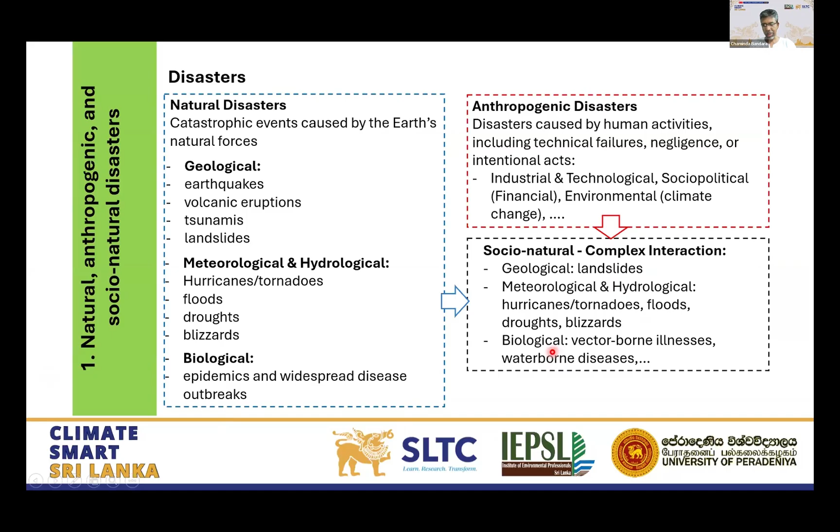Of course, one of the main issues in this socio-natural complex interaction is the climate change because of the global warming.

So if we look at some of these disaster records, what we see is an increasing trend of disasters, but fortunately, a reducing trend in the number of deaths. That is not because the disasters are less significant, but because the countries, the world, is developing. So we have a lot of technology to save people, to reduce deaths due to disasters. So therefore, even though there is an increasing trend of disasters, the number of deaths recorded is reducing. That is very fortunate, and also due to the development of technology.

And when looking at the significance, mainly the impact of the disasters, what we see is, when we categorize, for example, the droughts, the flood, the storm, extreme temperature, these are playing at a very high significance, including earthquakes. Of course, earthquakes are not mainly because of anthropogenic actions, but the others - droughts, floods, storms, extreme temperatures - are all related to climate change.

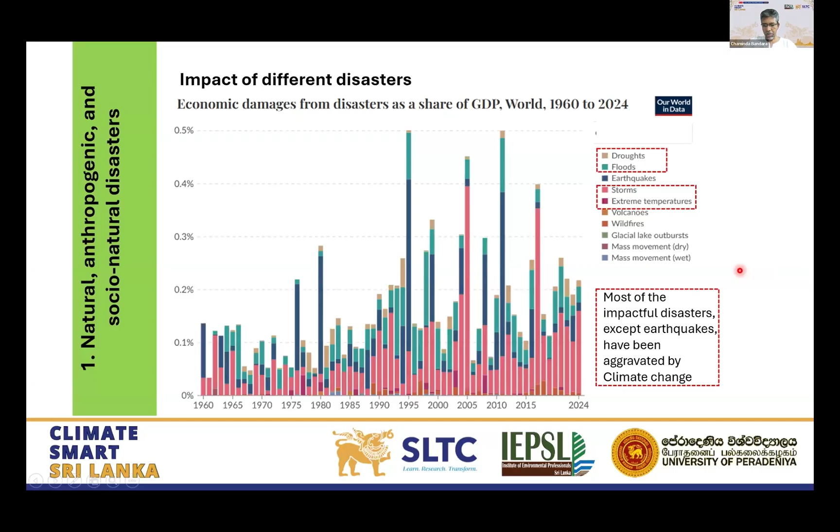A little bit about these anthropogenic actions related disasters.

I think we know the trend started from the Industrial Revolution, somewhere around 1800s, and then the consumption of materials, the consumption of energy, all those things increased rapidly, as we can see in most of this literature.

And at the same time, when you have high energy consumption, in return, we are emitting a lot of greenhouse gases. So again, as we see from 1800s, this increasing trend of emitting greenhouse gases.

And then we know that because of all these greenhouse gases that deposit at the upper layers of the atmosphere, that blocks the heat that penetrates into the earth, trapped within. So we talk about the global warming.

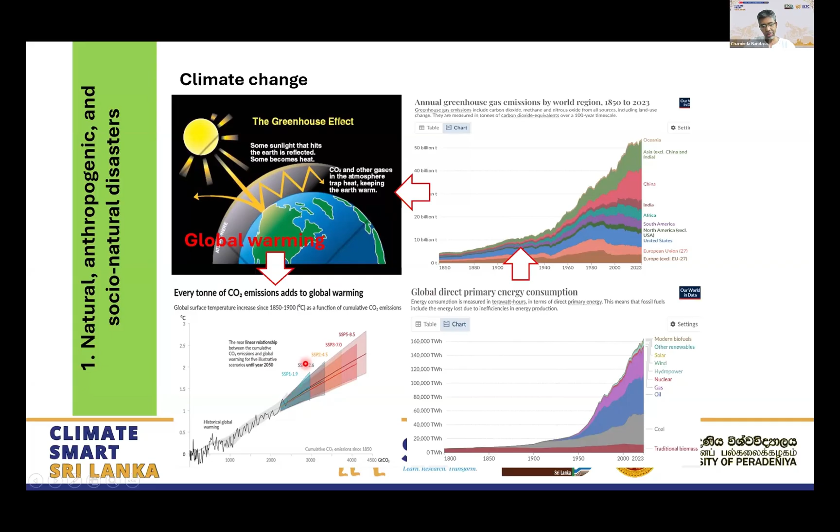And according to IPCC reports, we have almost exceeded the 1.5 degree temperature rise effect, which is kind of very significant and leads to a lot of problems in the world. So this is where we are at the moment.

And so with those, we are talking about these increased natural disasters. So as a result of the CO2 emissions, the climate change, and then increased natural disasters.

And so one of those is the disaster that we experienced in November. I think when we look at all around the country, this particular disaster's impact was for everyone, not for one region or one province.

And now where I am, in the central province, in and around Kandy, was one of the devastated regions. So I saw a lot of damages by myself because I am living here, and it was really impossible to think, just at that day and after 3 days until the things are cleaned out.

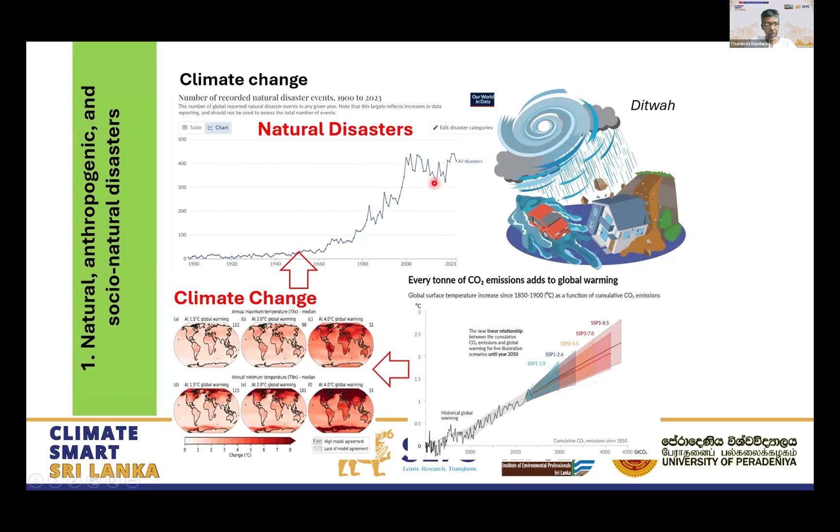And so now what is the relationship between this GHG emission and the construction and building sector? So that, because we are engineers, we are responsible for a large part of this matter.

Now, if you look at the records, again the literature, you see the electricity and heat, transport, manufacturing and construction, and then buildings. There are many items that are directly related to engineering that has a very high contribution to the greenhouse gas emissions, therefore to the global warming and the climate change.

So that is why I think as engineers, we should get together and discuss this. Of course, it requires all the other professionals, all the other disciplines to join hands to somehow minimize this problem.

The construction sector contribution is about 40%, from building operations about 28%, and then building materials and construction about 11%. Of course, this is a 2019 report, but it can't be a large difference even now.

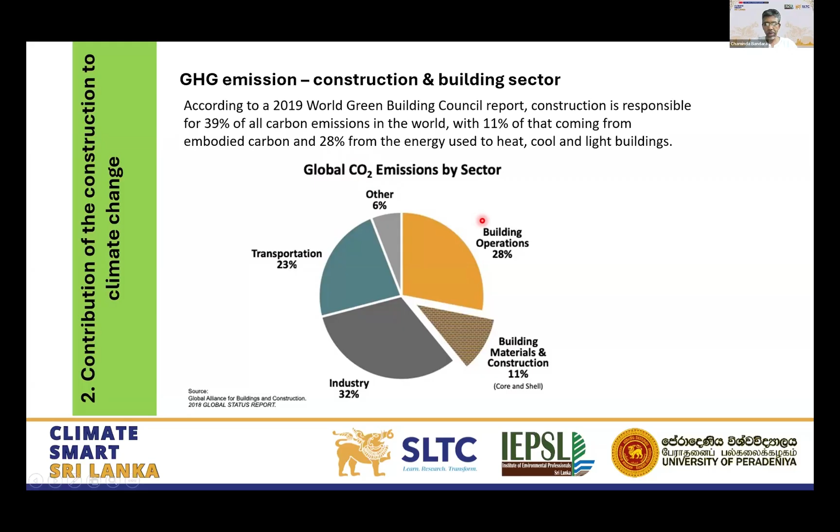So when we look at the population growth and also the building sector, the expected development in the future. By 2023, our population reached 8 billion, and by 2050, it is predicted it will be 9.7 billion. So that means within the coming 25 years, we are expecting another 1.7 billion people to come onto this Earth and be here.

So what does it mean? It means we have to expand the available or existing cities. We have to build further infrastructure, because this 1.7 billion within the coming 25 years will join us. So they need infrastructure as we need now.

So that means we are talking about further consumption of material, consumption, emission of carbon dioxide, if we don't take serious action.

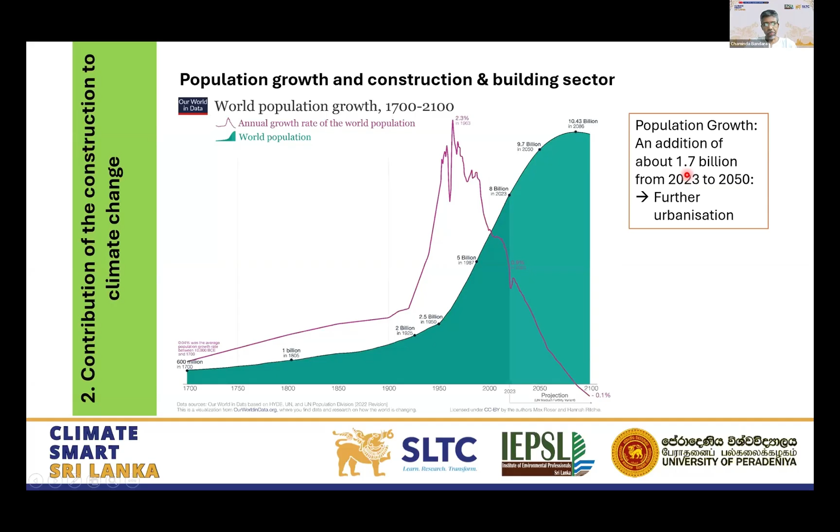That is how the urbanization is happening. The cities are expanding.

So the issue here, when we compare this city expansion with the greenhouse gas emission and also this climate change problem, is now to convert the carbon dioxide or the greenhouse gases back to the oxygen and the other non-greenhouse gases, the main thing that we need is the greeneries.

So what we do is, when we expand cities, the existing greeneries are reducing, isn't it? So then how can we convert this carbon dioxide back to oxygen if we expand our cities in this way?

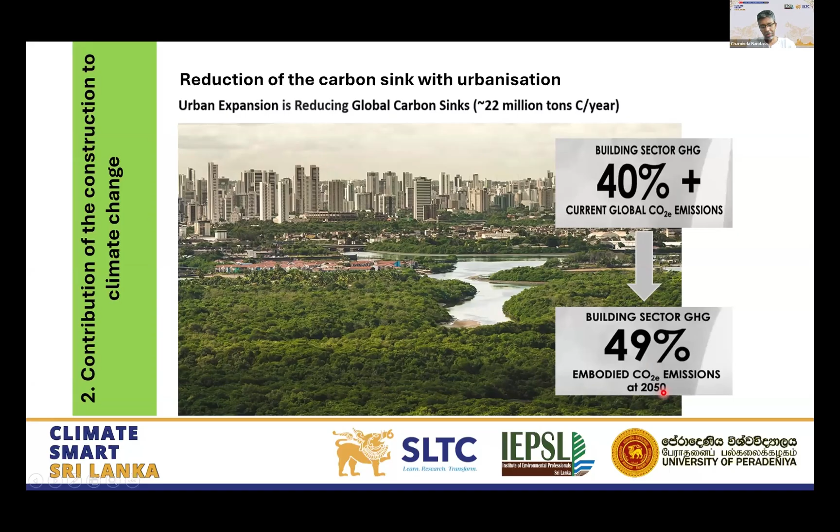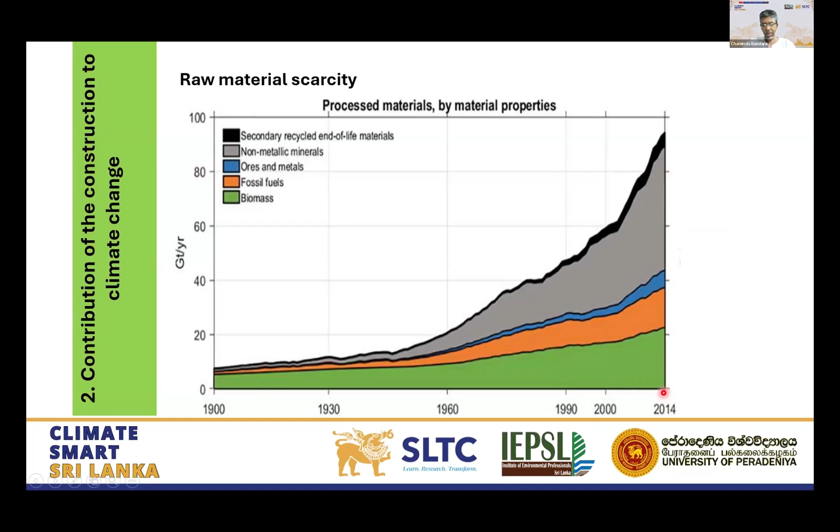So therefore, we are already in a material scarcity, that we know. The requirement we are expecting far exceeds what the planet can produce. That is the other issue we have to think about, because we have to expand cities. We need to provide infrastructure for the people, because everybody should have equal opportunities for living. But this is the problem that we have in the construction sector.

So here we talk about the future designs, the smart designs, the green buildings, the green cities, and all those. So climate resilient infrastructure is coming here. That means we have to look at the disaster side, because climate change is already happening, so disasters are aggravating. So when we, as engineers, design and construct infrastructure, one of the main things to look at is the disaster management aspects.

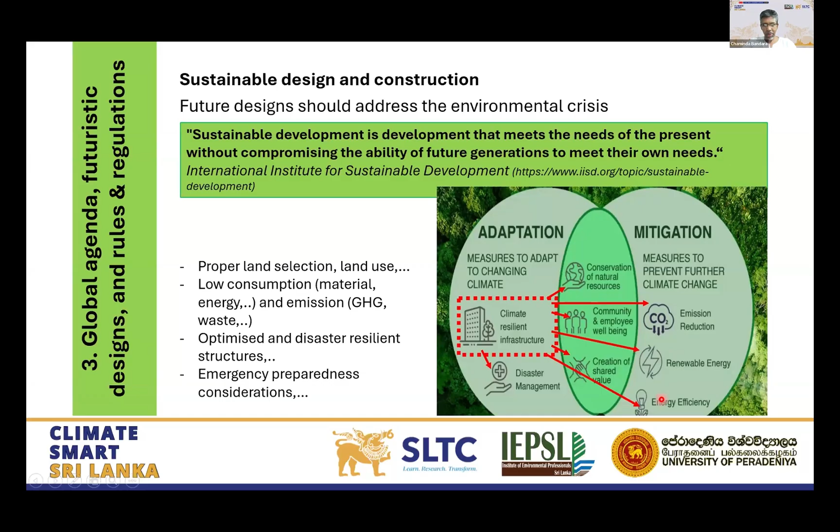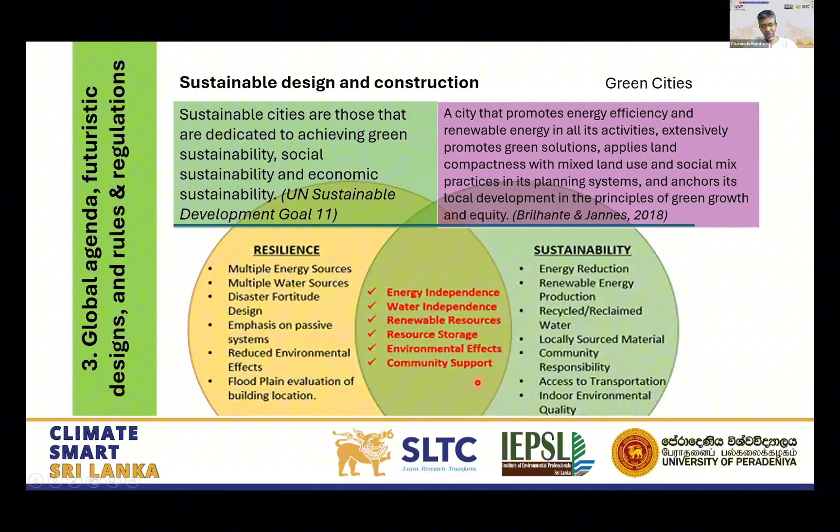So we have the global agenda, the Sustainable Development Goals. As we know, two goals - goal 9, which focuses on resilient infrastructure, and goal 11, once again focusing on the same side. There are already defined targets that even as a country we have agreed to follow, to achieve these targets, so that we have to remember. And also the Sendai framework, where we talk about minimizing disasters and the disaster effect on communities.

So then about the futuristic designs. One important thing is, now it's not always that we try to develop all the places on the earth or on this planet. We have to identify where to develop and what cost we will have in those developments, because then it's an optimization problem.

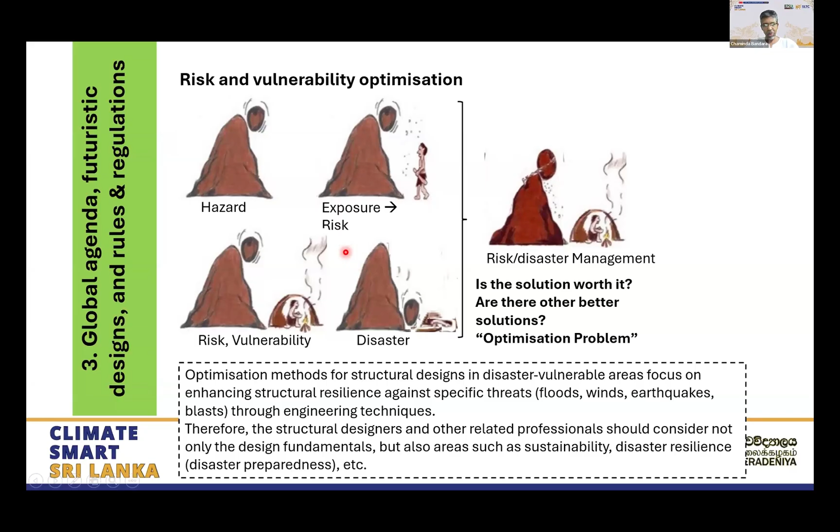Now, when we look at this optimization problem in detail, what I'm trying to explain is: we have a population to serve, and there are natural disasters. Not everybody is exposed to these disasters. Those who are exposed are only part of the population. When the population is growing, the exposure, or the number of people exposed to disasters, is also increasing, because people will go and build their infrastructure wherever possible, because they need those.

So with increasing population, the exposure of people to disasters will expand or increase. And the other thing is, if natural disasters are increasing, then also the population will start being affected. Like when there is a lot of rainfall in the upcountry, we see the damage happen in the cities, even up to Colombo, with a lot of flooding. So because when you have aggravated disasters, the population who were not even in disaster-prone zones can be affected.

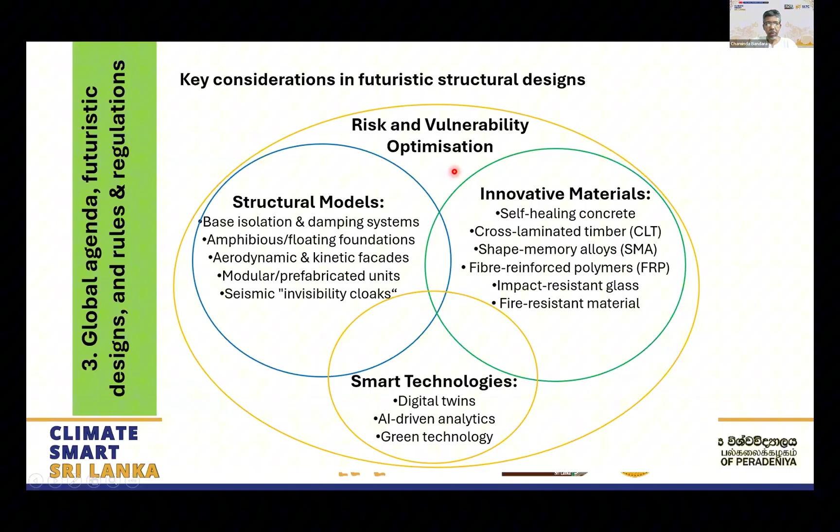Now, the key considerations in this case are here. Now, the structural design codes. As we know, we use design codes for our designs. So are these codes evolved enough for such smart designs? I am sure the codes are evolving, but still there is a lot to do. Of course, those are the engineers who should do these things.

These fixed rules in design codes should be flexible, and the design should be mostly performance based and not rules but frameworks. And we need to get the AI assistance in our designs, the smart materials, flexible structural forms, so they can adapt to various situations and all that.

So that is one side. On the other side, the rules and regulations, the building approval, the regulations. So are we still can go with these strict rules and regulations? Even rules are there, sometimes we are not following it. That's a separate story. But to go to this, there is a lot that we have to do.

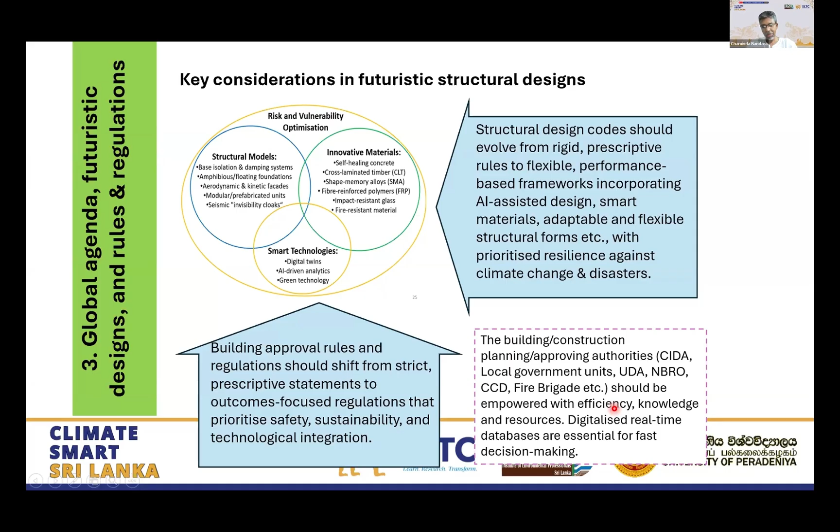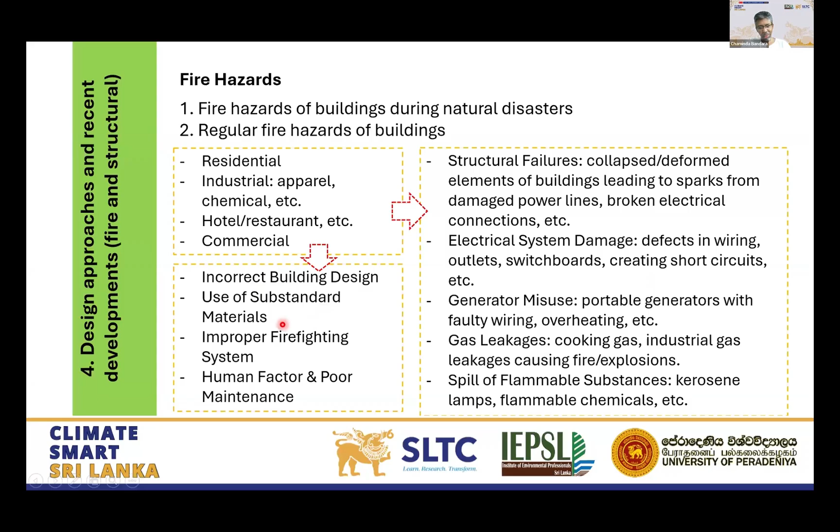And also incorrect building designs, use of substandard materials, improper firefighting systems, and human factors. All these are reasons. And if we look at records of fire hazards, we can see that building fires are one of the largest.

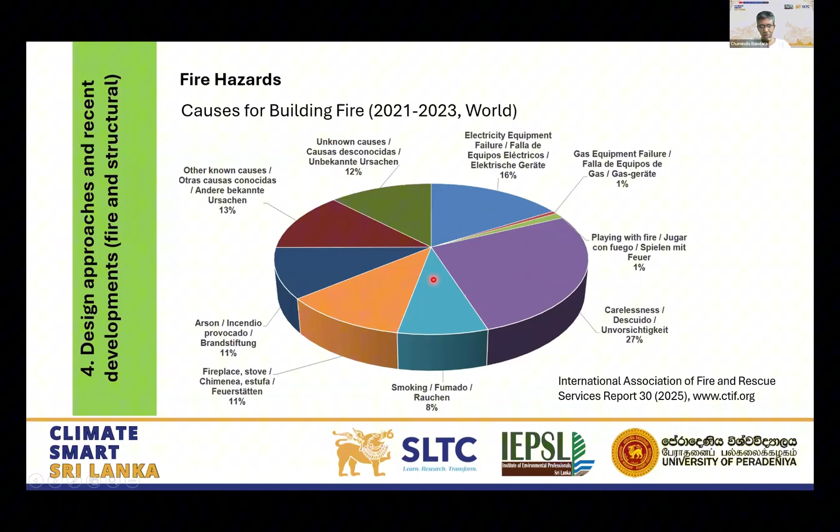If you see now, this is world fire statistics - electrical equipment, gas and related fires, and also smoking-related fires, carelessness. So there are many factors that cause fires in buildings. And if you see the deaths, most are due to residential building fires.

So in structural fire designs, of course, in Sri Lanka we have almost adopted using Eurocodes. Especially for the design of concrete structures and composite structures, there are several common areas, whereas for steel structures and aluminum structures there are slightly different areas to look at. And timber structures are kind of different a lot from the other codes, and also masonry structures.

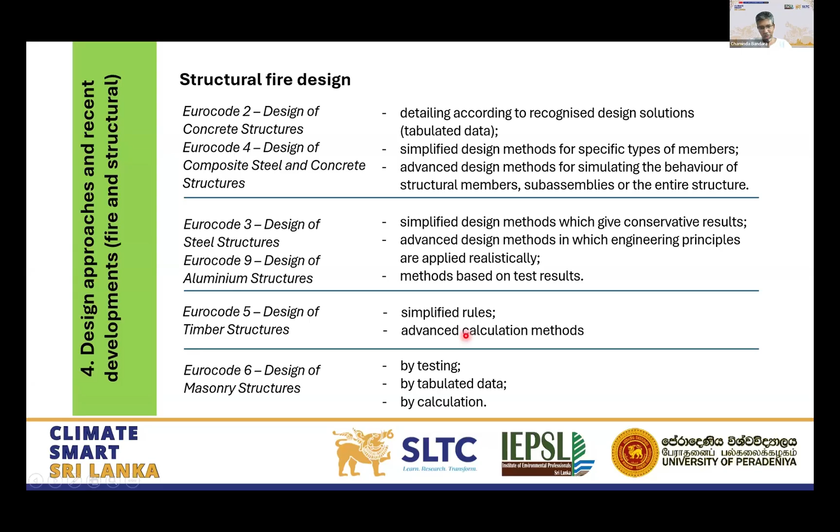So that is the available design tools that we usually use. And also, for the Eurocodes, we have the national annexes, and fortunately we have the fire design national annex also by the SLSI.

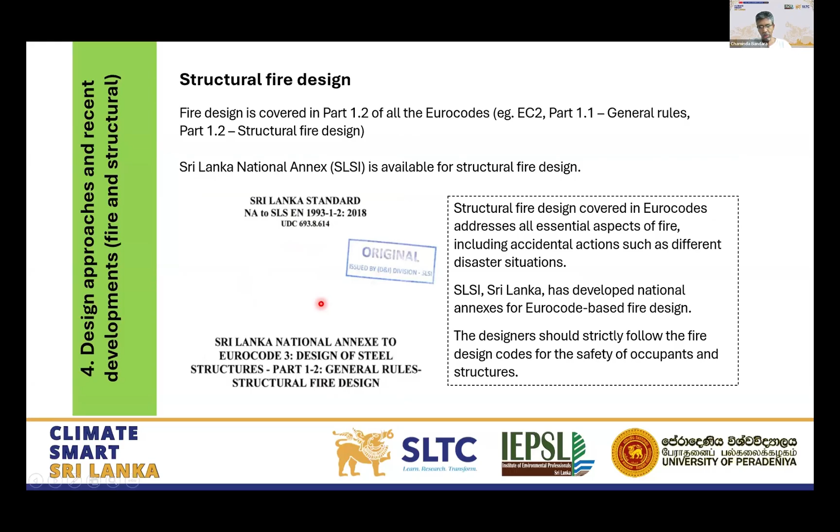So I think this is something noticeable, because we are also updating the design codes with local input.

And design fire scenarios, when we look at, we have three situations - the accidental design situations especially are applicable. Accidental design can be this disaster, for example. Then the structures where a particular risk of fire arises as a consequence of other accidental actions, relevant to disasters, for example. So we have to consider those scenarios.

And then in the normal designs, we have the global analysis, the analysis of parts of structures, and the member analysis. In the global analysis we look at the overall performance of our structures, how the compartments behave, and how the members behave in structural fire.

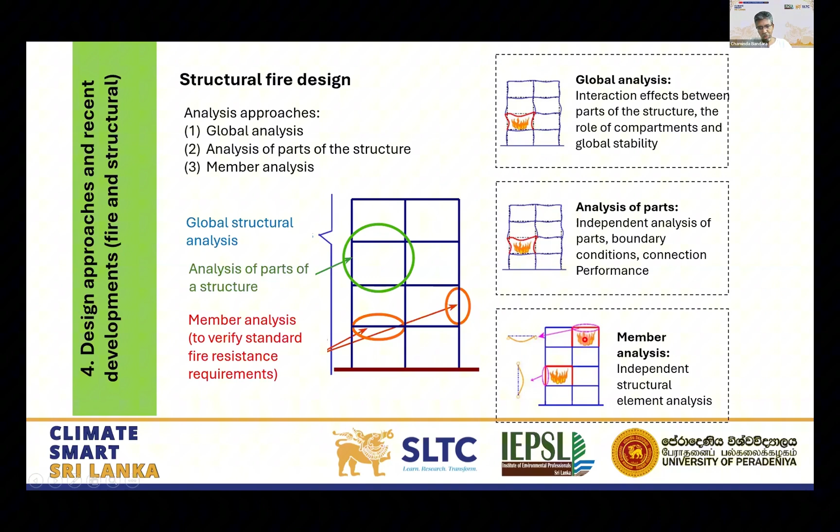And then in compartmental designs, in Sri Lanka there are specified areas or volumes for these compartments depending on the type of building, and also the effect of openings to be considered, and also the height of smoke, because smoke is one of the causes of most deaths due to fire. So this smoke height maintenance is very important.

And also when we go to the local member related areas, we have to verify the material strengths, the strength of members, and also the protection of those members in our analysis, and also the numerical simulation.

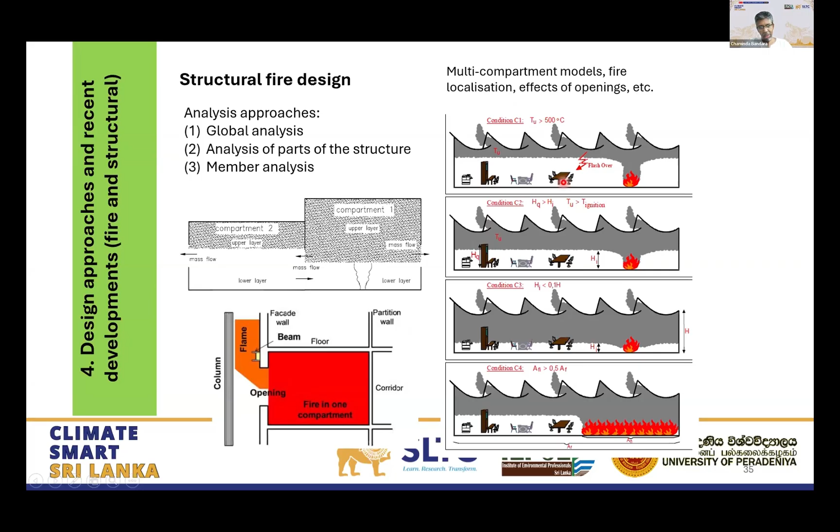So what I am showing you is some of the work we have done by our team related to cladding studies, like glass facade fire, and various other sustainable materials. So we have done some work, and also because the simulations are possible now.

So I think that's where we want to direct our nation, because we are talking about smart development. Rather than wasting a lot of time on real testing, if you have validated numerical models, those are very easy and convenient tools for the predictions for the designs.

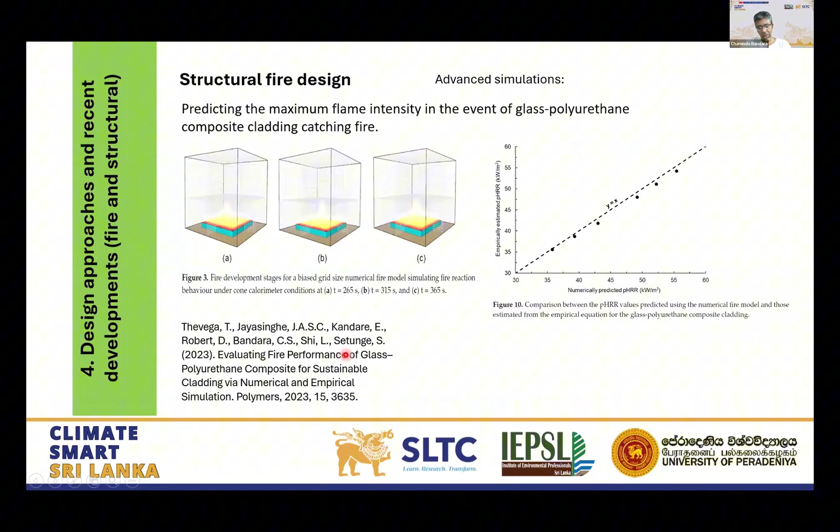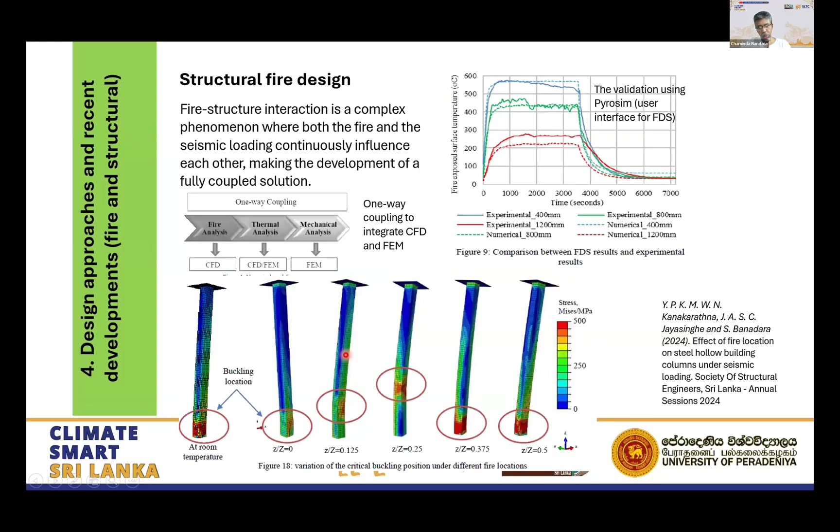So hoping to have questions and answers, and back to the moderator, Dr. Herath.

Right. Thank you, Professor Bandara. I think that was a very insightful discussion, and I think you looked at mainly four different aspects on the natural disasters and how the construction and building sector contributes from various angles to this climate change, and also how the global stage, or how the other developed nations and also the developing countries look at this - the policy level decisions on rules and regulations. And lastly, you touched upon the design approaches, including all these Euro codes and the national annexes, and gave some idea on where we are as of the global trends.

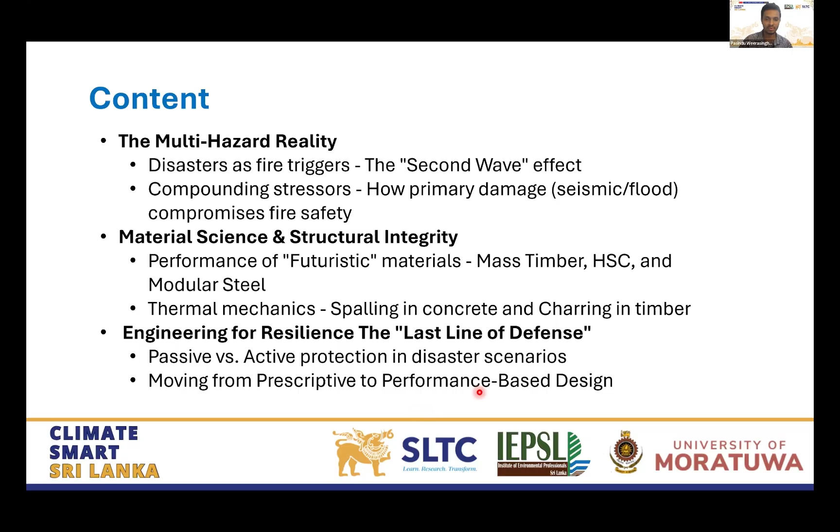So before I go into the details, I hope you, maybe if you were born in that time, you may remember this disaster, the 2001 World Trade Center collapse.

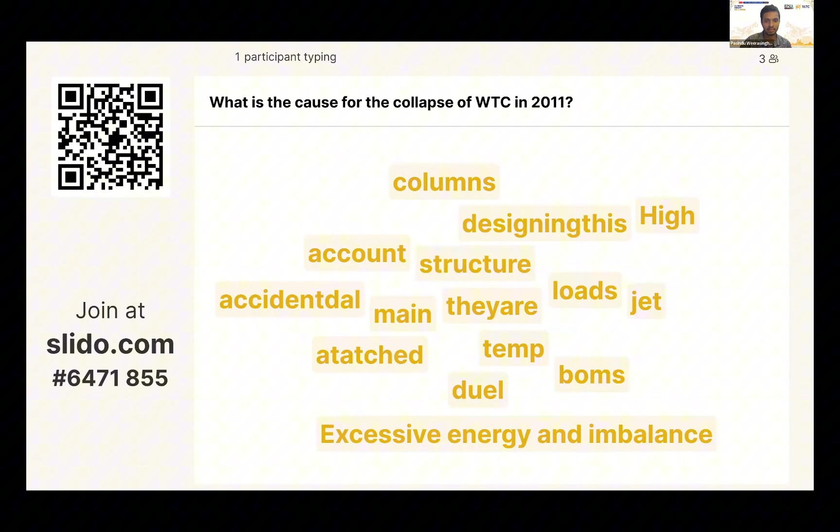Right, so we have a couple of answers ranging from columns, structure, jet loads, bombs, fuel, temperature, and excessive energy and imbalance. The word that I was looking for is still not there.

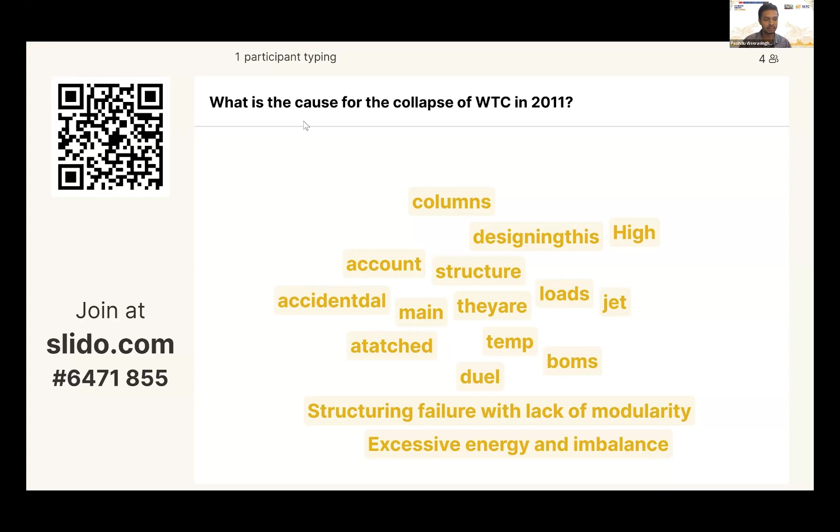Maybe we'll move on to the next slide. Thank you for your enthusiasm. Yes, I can see one other participant is typing. We'll give one minute if anybody else is willing to join.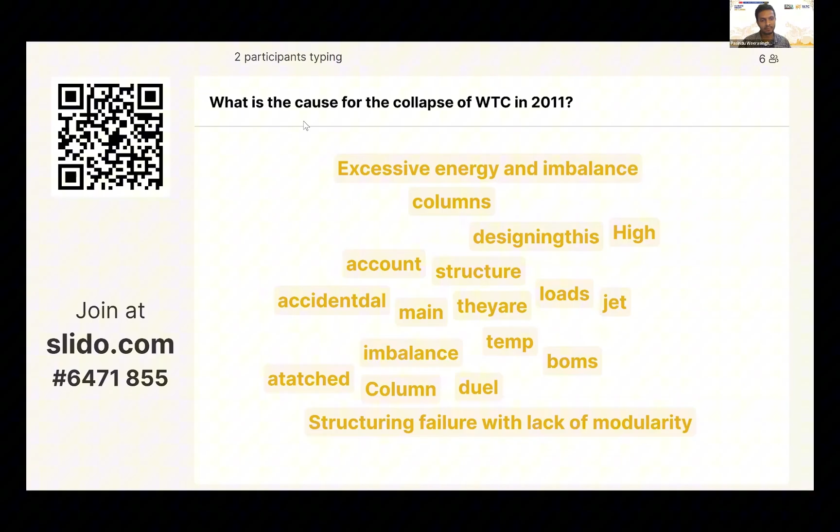Hitting the center of gravity, geopolitics - yes, in a way it is true. I mean, it was a terrorist attack after all.

Steel columns are not fire protected enough - yeah, we are getting there, I think. Actually, the columns were fire protected, but we'll discuss the real reasons now.

Now, this was a tube in tube structure. We have an inner tube and outer tube, which are closely spaced columns acting as an outer tube and an inner tube. So the rigidity of the structure was given by these two tubes, and they were connected using lightweight floor trusses. Now when the plane impacted on the tower, there was damage to this outer perimeter. So the outer tube was damaged.

But actually this was designed for such an impact load. In the design, it was considered that if accidental damage happened to the outer tube, whether the inner tube would resist the lateral loads and hold the structure without any catastrophic failure.

But the next thing that happened triggered the progressive collapse. There was a lot of fuel in this aircraft, and due to the blast impact, this fuel got ignited, and then there was fire. And due to the impact of the blast, the protective layer that was protecting the steel members from fire got damaged, and now the steel is directly exposed to these fires, estimated at about 1500 Fahrenheit.

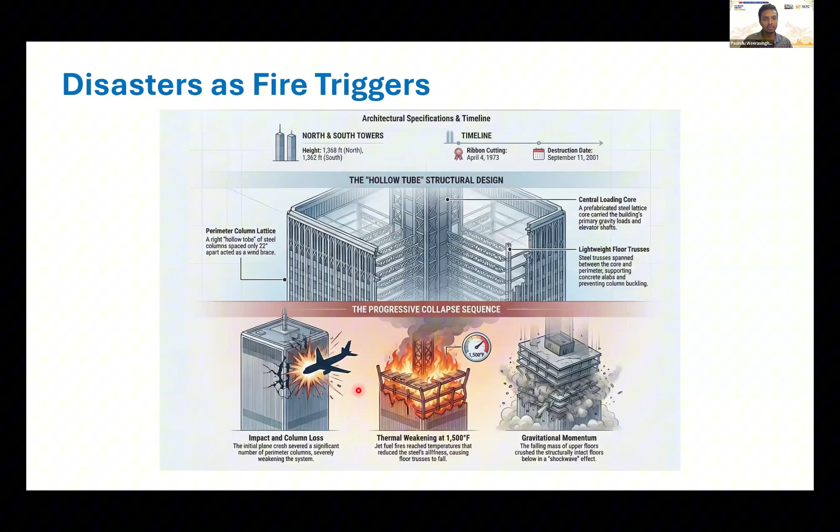And if you think about the earthquake situation where the ground shakes, it could result in failures in gas pipelines or power failures or failures in power lines, and these would cause a secondary fire, gas fire, or electrical fire. Due to the disaster situation, it is difficult to control - firefighters will have difficulty accessing, and the scale of the disaster is significant in an earthquake event. So it is another case where a disaster will trigger a fire event.

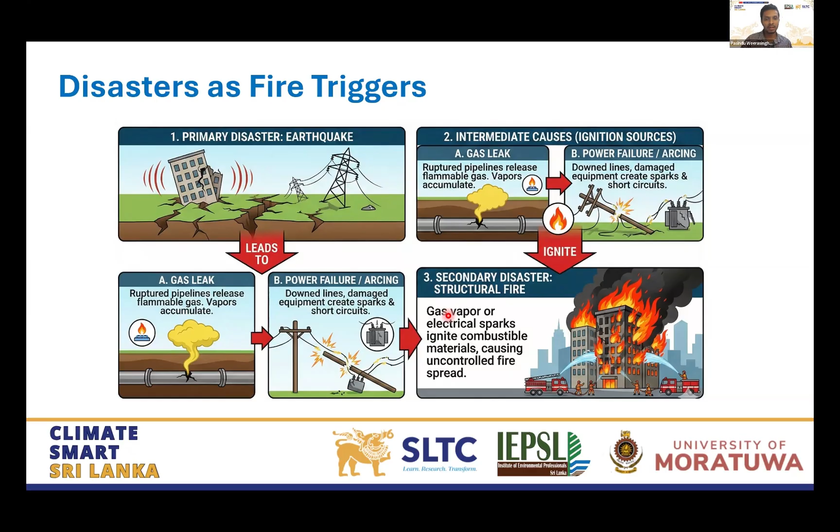And if I take another example, wildfires. Wildfires, if not controlled, can reach the urban environment. In wildfires, certain things are generated called embers - flying heated particles. Due to the wind, they get carried away, and when these flying embers hit or touch a combustible surface, it will ignite that surface as well, causing a fire a certain distance away from the wildfire.

So this is called the wildfire interaction with urban interfaces. Again, the disaster was a natural disaster, wildfire, but it is turning into a catastrophic fire event, a secondary disaster that could affect our own livelihoods.

So this is a very good example of such an event, the Kobe earthquake that happened in 1995. After the earthquake, it was reported that approximately 300 fires occurred. You can see from this image the scale of the devastation that happened there.

The probability of why it happens is like this: it could ignite due to toppled furniture, movement of hot equipment, or electrical short circuits. If it causes ignition, then it can spread. So in disasters, fire is often the second wave that causes significant structural damage.

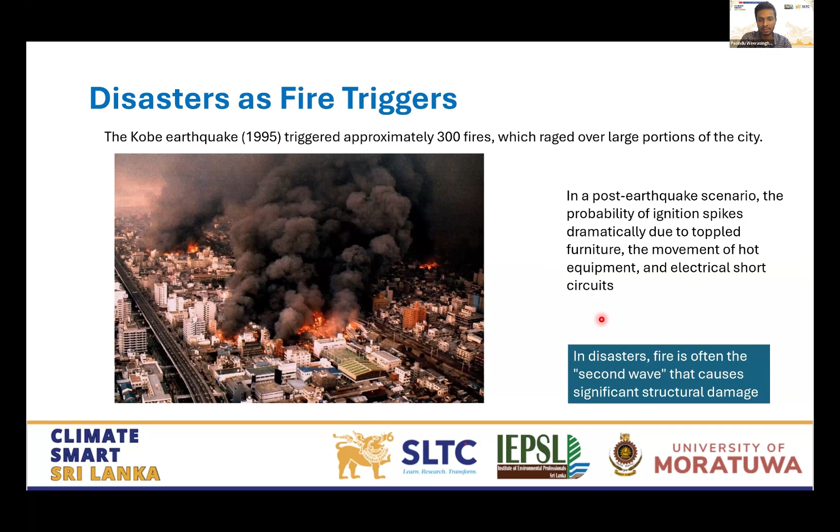In case of an event like Ditwah, what could happen in the Sri Lankan context? If a structure is subjected to flood or wind damage, the structural integrity is compromised. It will have openings and cracks, and no longer can fire be contained in a certain place. We call this in fire engineering terms the compartmentation of fire, containing the fire within an enclosed environment. That is not possible if damage like this has happened.

So then as a secondary event, if a fire occurs or ignites, that would be uncontrollable. It will quickly reach the flashover stage, and also it is difficult for firefighters to access such scenarios.

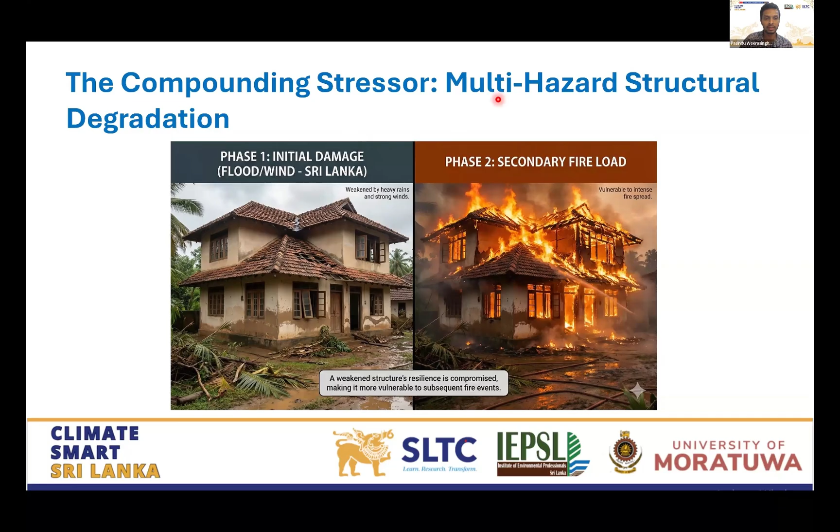So it's a multi-hazard degradation. We call it compounding stressor. The stress that occurred due to the disaster is elevated due to the secondary effect of fire.

Due to the primary disaster, it could be a blast, impact, seismic event, or a flood event. The structure faces severe secondary thermal loads due to a secondary event, and that initial disaster often cracks the fire-resisting compartment walls or strips away any sprayed fireproofing if it is a steel structure. Then the secondary fire will induce extreme thermal expansion or catenary forces on the already damaged structural frame. Finally, this combination of mechanical damage and material degradation dramatically increases the risk of progressive collapse of the structure. So this is the background to my presentation.

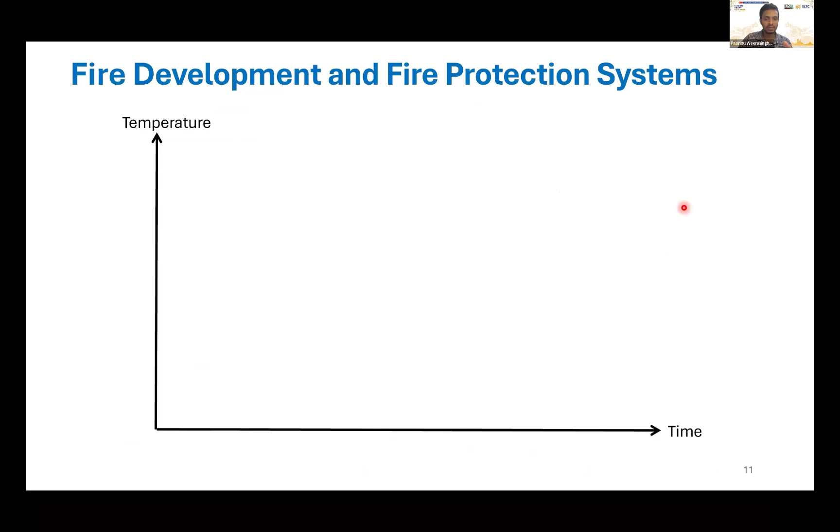Before we move ahead with the other slides, I would like to give you a brief overview of some technical terms that we use in fire engineering. To categorize a fire, we use a time-temperature history, and this is the behavior of a natural fire curve. It will have an ignition phase, a flashover stage, the ultimate stage, and finally the cooling stage.

The ignition phase can take about... these are rough figures. During the ignition stage, the temperature will increase slowly, and then this scenario called flashover will happen. Flashover means suddenly all the combustible material in the vicinity of that particular compartment will catch fire. We call it flashover.

So after the flashover, you can see that it grows rapidly. Before the flashover, we call it the pre-flashover stage, and these temperatures are just estimated values. After the flashover, the fire will grow rapidly and reach the fully developed stage. Then after the fully developed stage, maybe the fuel will run out or the ventilation will cease. Probably the most common thing is the fuel running out, and then it will no longer burn, so the fire will decay gradually. That is called the decaying phase or cooling phase.

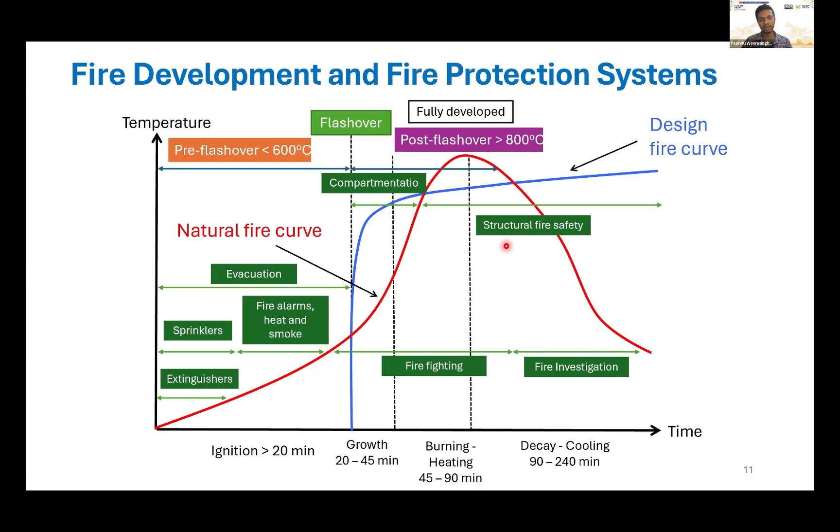So the passive fire protection that I'm going to discuss next is based on this post-flashover behavior, and the fire investigation can happen after it has decayed or cooled down.

We have several standard time-temperature curves which represent the behavior of a fire. Typically we use the ISO standard fire curve, which looks like this. In certain cases the fire will be more severe, such as in car parks or where you have more fuel load. In such cases we use a fire curve called the hydrocarbon curve or other fire curves which have a much more severe, rapid increase in temperature at the early stage.

The severity of a fire is identified not by the maximum temperature it reaches, but by the area under the fire time-temperature history. That means even if a fire has a higher temperature but cools down quickly, its severity is less compared to a fire which lasts for a long period, even though the temperatures are lower.

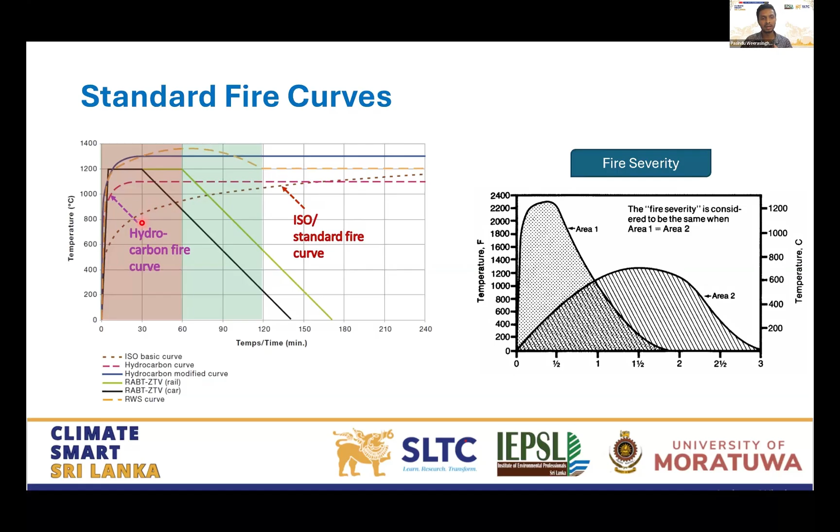Then we have something called parametric fire curves. All these fire curves I have shown are design fire curves. You can see certain cases have a cooling phase, but these do not depend on certain characteristics. Simply, it's a standard prescribed time-temperature history, irrespective of the characteristics of your structure.

But in certain cases we may have to look into the structure as well, depending on how much openings you have, what is the ventilation condition, what is the geometry of the space you are having the fire in, how much fuel load is there, and what material is burning.

So if you take all that into account, we can generate something called a parametric fire curve. It has an increasing regime, flashover stage, post-flashover, and then the decaying phase as well. The higher temperature and the duration of the decaying phase will all depend on the factors I mentioned. I will later explain what is meant by performance-based design.

If you're actually going for a performance-based design approach, these parametric fire curves are the ones to use. And as I mentioned before, the severity of the fire is described by the area under the time-temperature history.

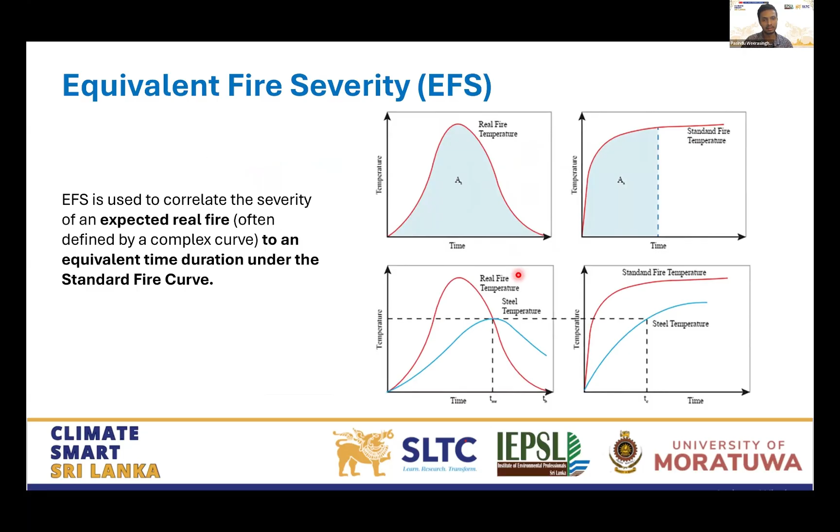And then finally, what we need is a certain fire resistance from our structural members. The fire resistance level can be categorized and measured by three criteria. The first is structural adequacy, the ability to maintain the load-bearing capacity for a duration of time when exposed to fire. That is called the structural adequacy criteria.

Then the integrity, the ability to act as a barrier that resists the passage of flames and hot gases. So if the fire is burning here, this should act as a barrier for a certain time period where smoke and flames will not penetrate to the other side.

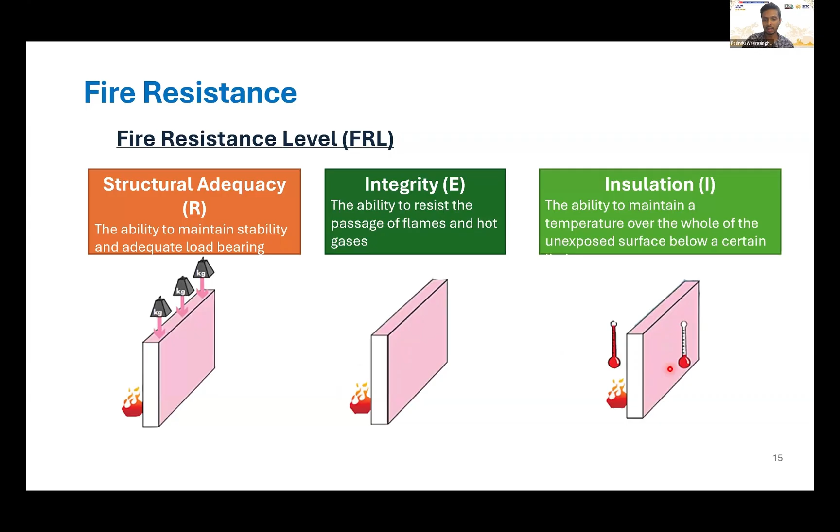And finally, the insulation, the ability to maintain the temperature of the unexposed surface for a certain period of time when the fire is happening on the other side of the element.

Usually these fire resistance levels are given as a time period. If you say 60, 60, 60, that means when exposed to, let's say, a standard fire, until 60 minutes it will maintain its structural adequacy, until 60 minutes it can maintain the integrity criteria, and until 60 minutes it will maintain the insulation criteria. So it is a 1-hour fire rated element.

It can be a fire-rated wall or a fire-rated door, or it can be a fire-rated structural element or non-structural component.

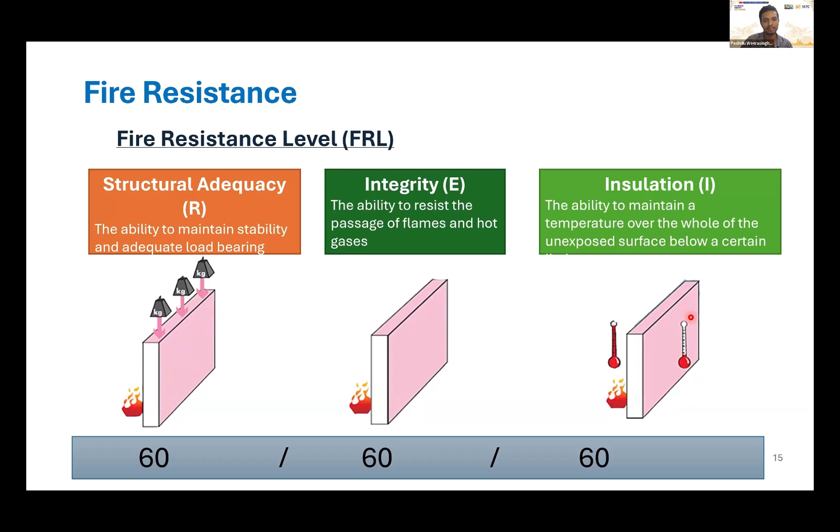Then, as fire safety engineers, our aim is to mitigate the impacts from the fire hazard. So the first line of defense is these fire safety provisions and fire codes, as Professor Bandar mentioned. Our one is ICTAD fire regulations, and they are developed to incorporate appropriate measures to mitigate the destructive impact of fire in our structures.

The mitigative measures can be in the form of preventing ignition in the first place, and if ignition happens, minimizing the fire spread after that. That could be one approach. The other approach is, if ignition happens, we have to facilitate the safe evacuation of occupants before the structure fails. And thirdly, until the fire is controlled or contained, we have to make sure the structural integrity is maintained, so the structure will not fail until the fire is controlled.

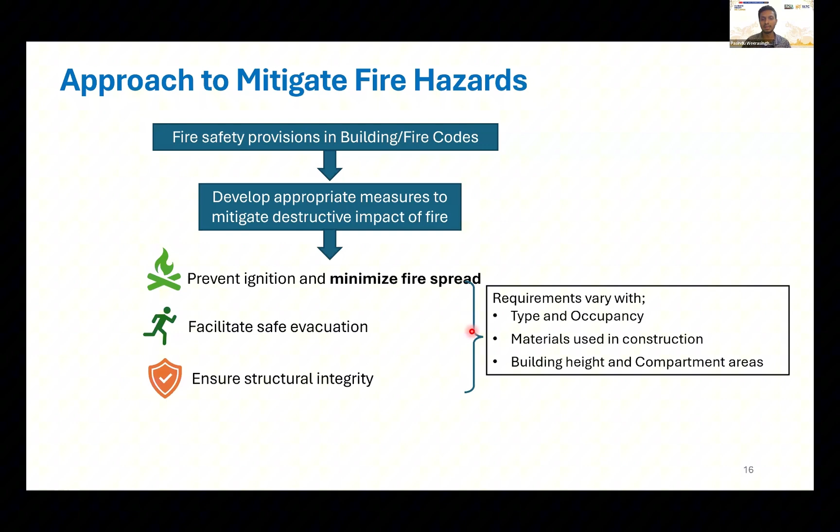These requirements will vary by type of building, occupancy level, the materials being used, and also the building height and compartment area. So we can't have one solution for all structures. It will be a building-specific or structure-specific solution that we have to incorporate.

As for regulation, CIDA regulations are there, and if you look at the global arena, the International Building Code, the National Construction Code, or NFPA guidelines, these are some of the prominent fire codes that we are using. And minimizing fire spread, we call that compartmentation.

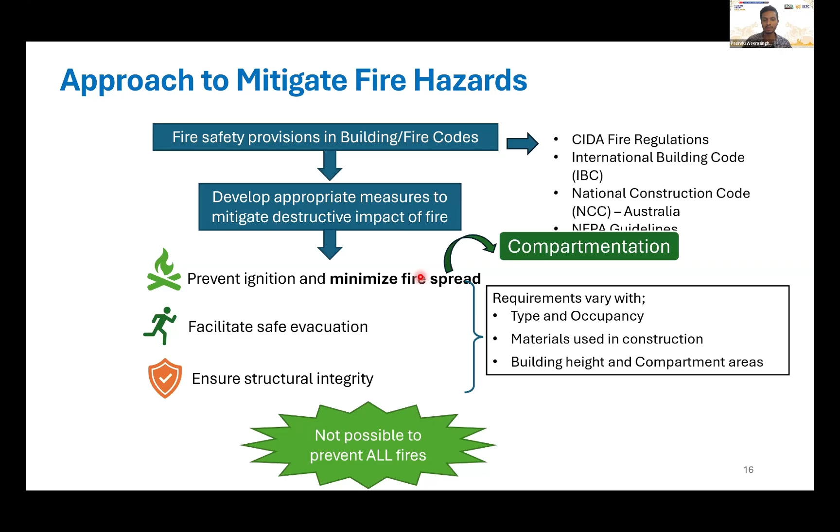That is the basic concept in passive fire protection. But however much we try to minimize this harmful effect, it is not possible to prevent an event of fire, because it's an accidental event, right?

So as designers, what we do is place certain strategies to minimize the occurrence of this. And if a fire occurs, we try to minimize the consequence impact on our lives, property, and the environment. That can be achieved by two means.

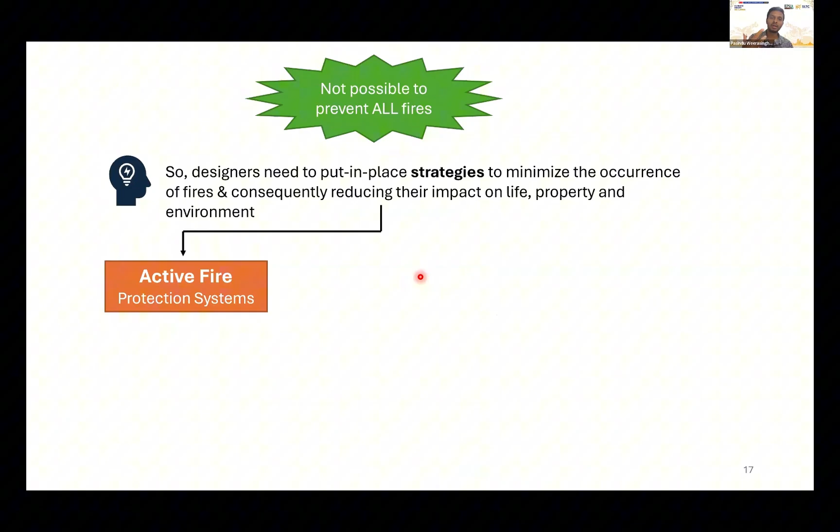One is through active fire protection systems, which are activated when a fire occurs. Examples are fire sprinklers, fire detection systems, and fire alarms, things like that. Basically, they react to fire. That is why they are called active fire protection systems.

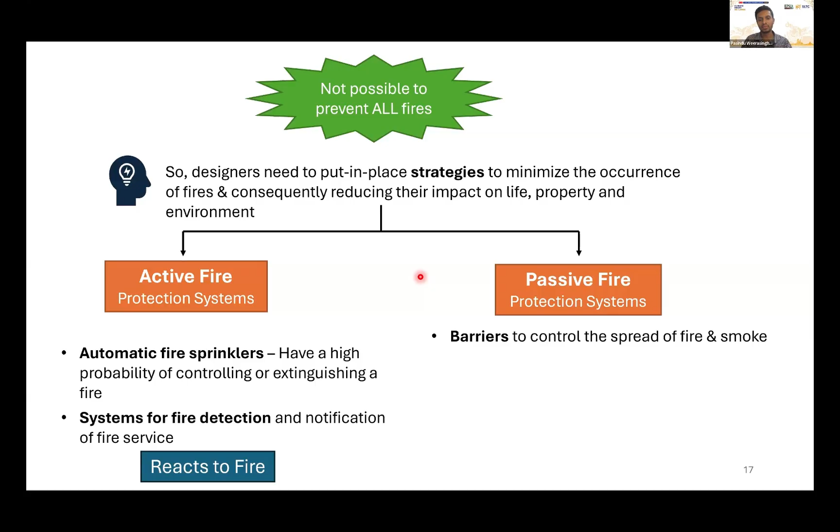Then the other side is the passive fire protection system. These are not activated, they are just inbuilt in the structure. One passive fire protection measure is barrier walls or fire doors to control the spread of fire, basically to maintain the compartmentation.

In case of evacuation, the building or structure should have safe travel paths for the movement of occupants as well as firefighters to come into the building and fight the fire. And finally, until we do all those things, the structure should not collapse, so we need a fire resistant structure.

So these measures are designed to contain the fire if it occurs. In case of a disaster, I will talk about it later as well, this active fire system has a chance of malfunctioning due to various reasons. So in that case, our last line of defense is these passive fire protection systems.

In terms of differentiability, in terms of mechanism, active fire systems require some kind of triggering, but passive fire protection relies on built-in properties, so inherently they are there. In terms of effectiveness, active fire protection systems are effective mainly in the early stage of fire, before flashover as I showed you before.

But passive fire protection is effective even in the fully developed stage. The objective of active fire protection is to extinguish and facilitate early evacuation, whereas for passive fire protection, the purpose is to contain and ensure structural integrity or stability during a fire.

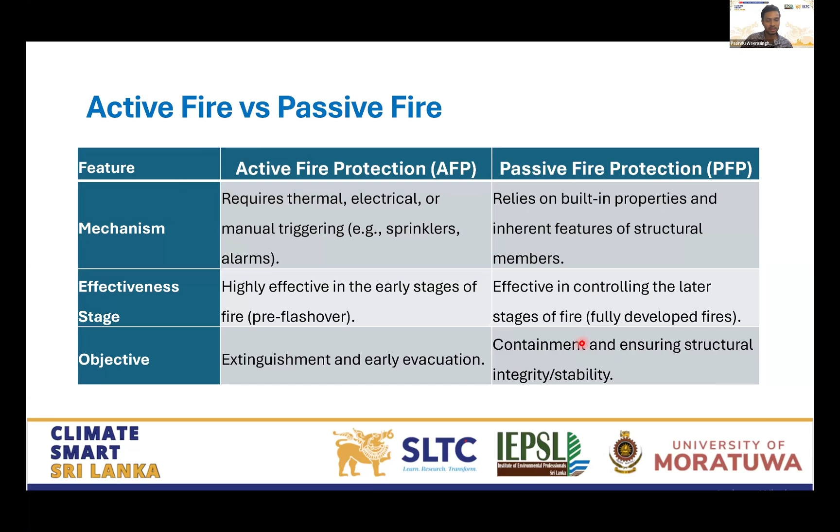So for the next five minutes, I will briefly talk about different material behaviors under fire, mainly timber, high strength concrete, and modular steel frames, because now we are moving into this era of sustainable construction, and we have to look into these futuristic materials and how they behave in fire.

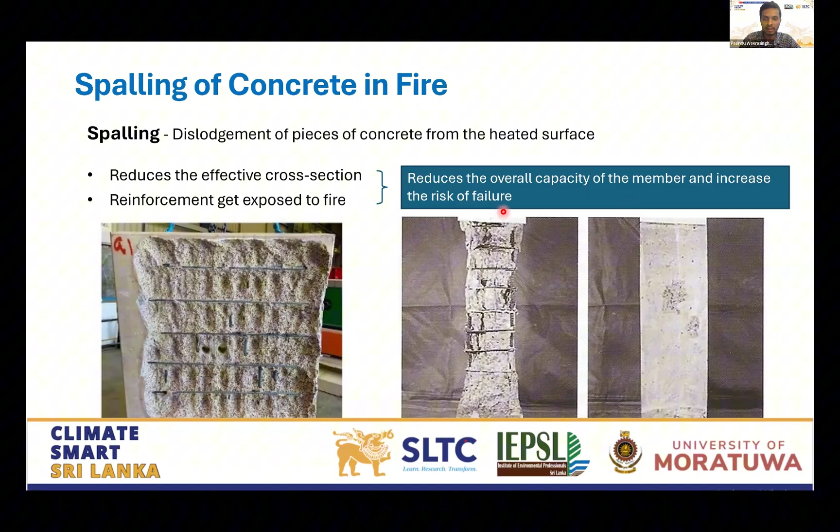In terms of concrete, especially high strength concrete, spalling is one of the critical issues. That means when it is subjected to fire, the exposed surface of concrete will dislodge, reducing the effective cross section of the concrete member, and the reinforcement becomes exposed to fire. Overall, that reduces the capacity of the member and increases the risk of failure.

So why does concrete spall? Mainly because of pore pressure development during fire. In case of a fire, the moisture trapped inside the concrete tries to move away from the heat, or tries to penetrate inside, but there are no free paths as such. It has to move through the pore structure of concrete, and somewhere it gets stagnated and pressure develops.

Once this pressure develops, it causes an expansion, trying to expand from the inside, causing tensile stresses. Once that exceeds the tensile capacity of the concrete, this part will dislodge or detach from the original structure.

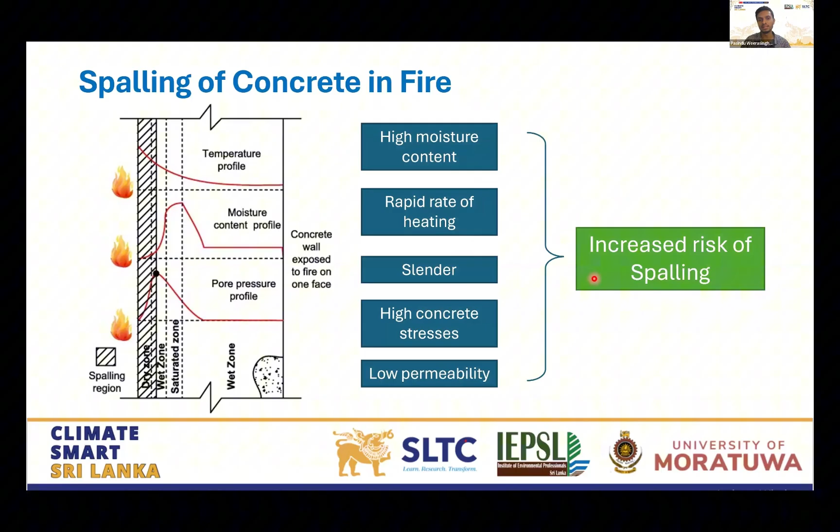So if you have high moisture, rapid heating rate, slender members, high concrete stresses, or low permeability, especially in high strength concrete which is low permeable, all of these increase the risk of spalling in high strength concrete. So then what is the solution?

One solution is adding small polypropylene fibers to the concrete. At around 200 to 300 Celsius, these fibers melt and create a path for the pore pressure to release. If this pore pressure is released, that will not generate high tensile stresses.

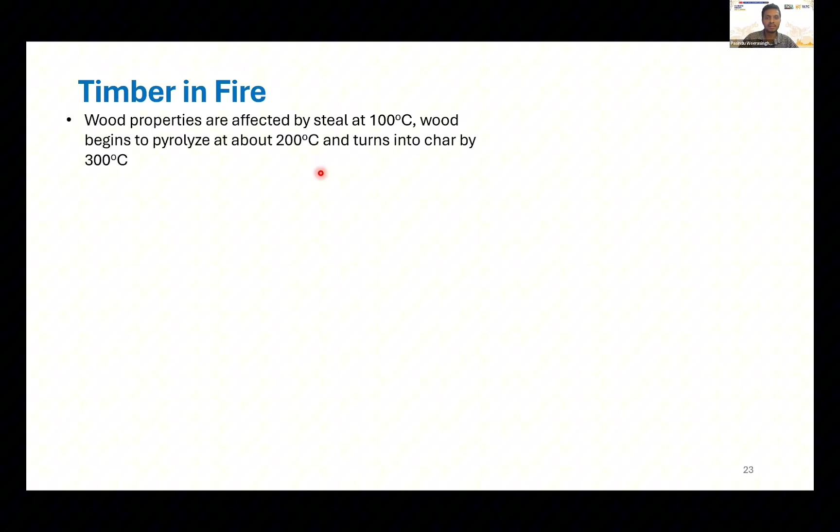Another material becoming more popular is timber. Although we think of it as a combustible material, certain characteristics of timber are actually beneficial in fire. Timber begins to pyrolyze at about 200 Celsius, and turns into char at 300 Celsius. This charred timber is this black colored part.

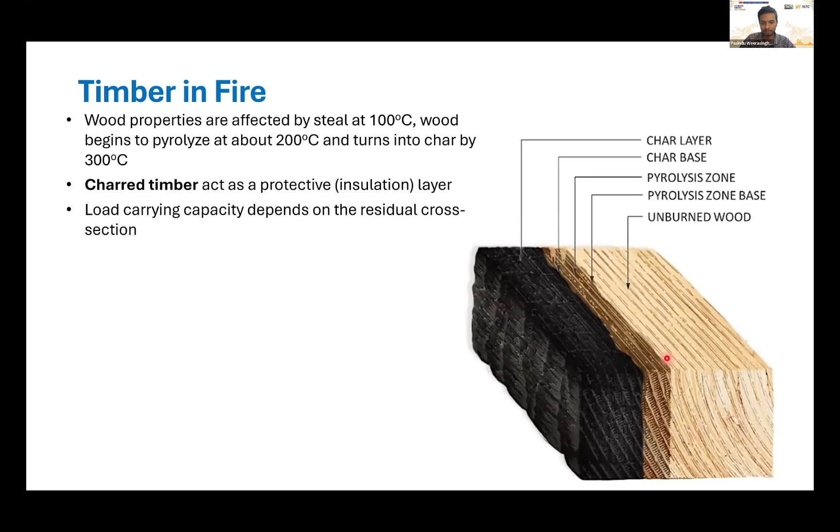That is beneficial because it acts as an insulation layer, protecting the inner timber from further charring. So the load carrying capacity of a timber member subjected to fire will depend on this protected layer, which we call the residual cross section.

The charred timber can't be used to carry any loads. So the fire resistance of timber members will mainly depend on the rate of charring - how fast it chars when subjected to fire, and how fast it reduces the usable residual cross section. If it's charring too much or too fast, that is not preferred. If it's charring slowly, that type of timber can withstand fire for a longer duration.

Cross-laminated timber is becoming popular - we now have some multi-story buildings from CLT, not in Sri Lanka but in other parts of the world like Europe and Nordic countries. CLT buildings have superior structural performance and can even be used as columns in tall buildings.

But the fire characteristics need to be questioned, because unlike normal timber, once CLT chars, since it's constructed using several layers, that charred layer will fall off. Once it falls off, new timber is exposed and subjected to fire. So the charring rate will increase overall in cross-laminated timber. Risk of delamination and exposing new layers to fire are some issues that need to be addressed in CLT members.

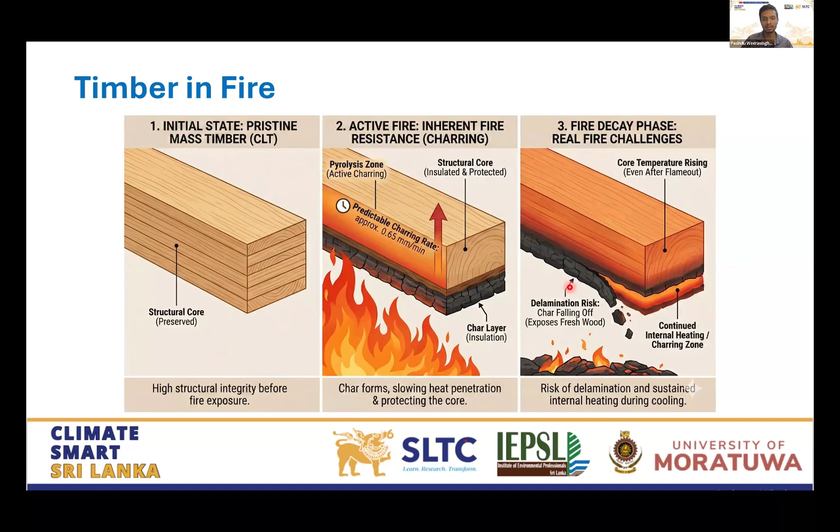Finally, I will touch on modular construction. Modular construction is off-site fabrication of buildings - it's like building blocks put together to make a final structure. This was a new topic for Sri Lanka for many years, but now contractors are using this modular technique even for tall buildings, which is a good thing.

Especially in disaster situations, modular construction can be the game changer because you don't have enough time to construct in-situ buildings on site. In that case, modular construction can become handy.

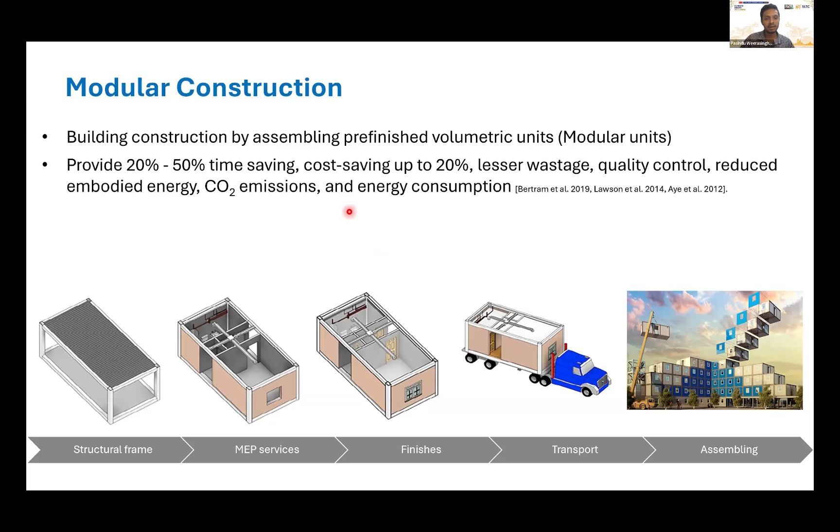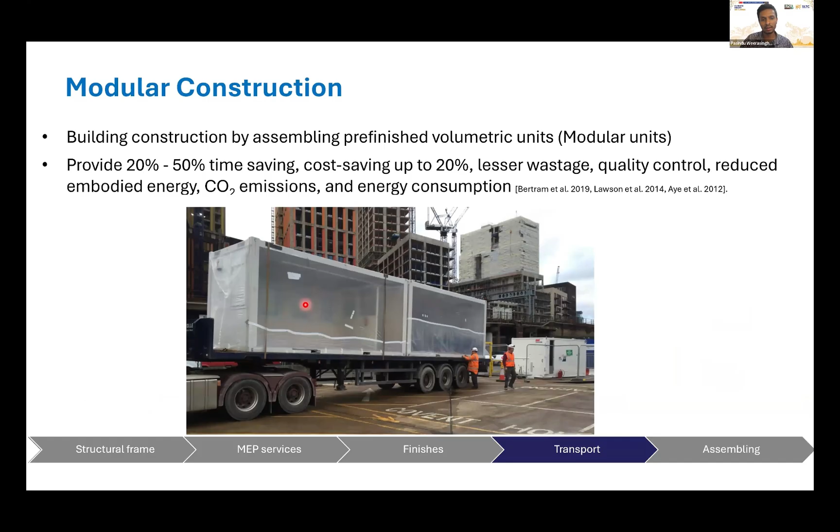Since they are constructed off-site, they provide about 20% to 50% time saving, 20% cost saving, and less wastage. Steel members are put together as a volumetric assembly along with MEP services and finishes, then transported to a particular site and assembled to build the final structure.

In modular construction, the concern is these cavity spaces that are inherently there between modules. If fire can penetrate into these cavities, it can travel vertically as well as horizontally throughout the building, which is not the case in normal buildings - we don't have such cavities. So in modular buildings, the cavity fire risk is significant.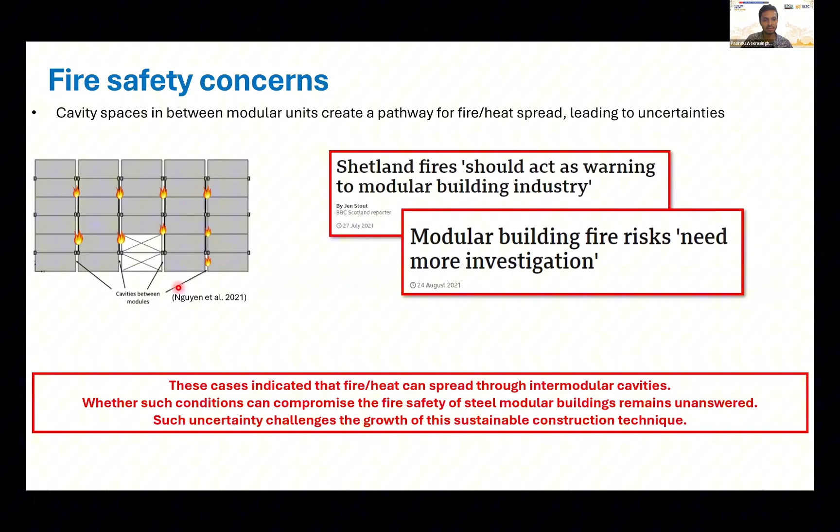These are recent disasters that have happened involving this module - you can see here the fire spreading through the cavities.

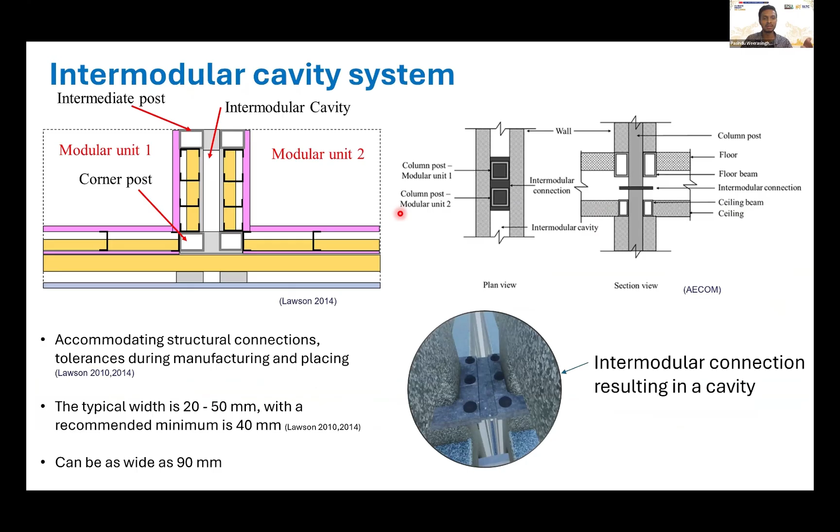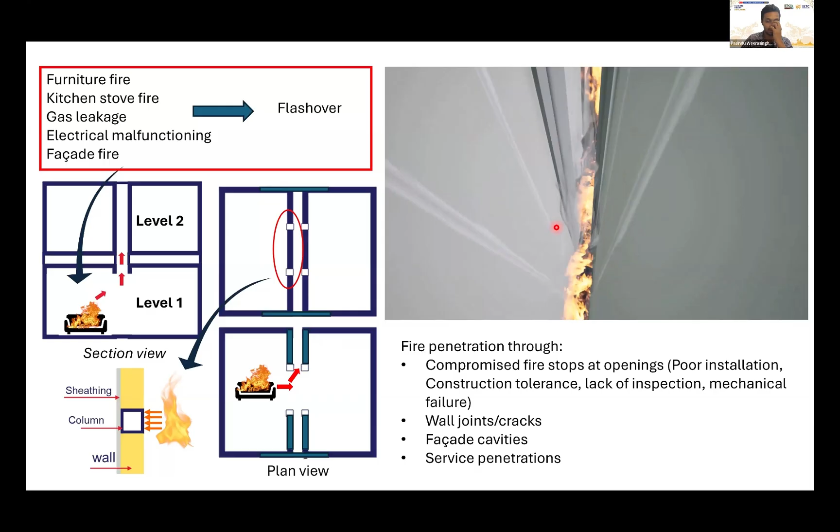We have done some research on this cavity and how cavity fire will affect the structural members - if you have any questions on this, I'm happy to answer. But the basic problem is compartmentation is difficult here because of these cavities. We have to either seal the cavity or use fire stops to prevent the spread of fire within these cavities. Some kind of measure should be taken.

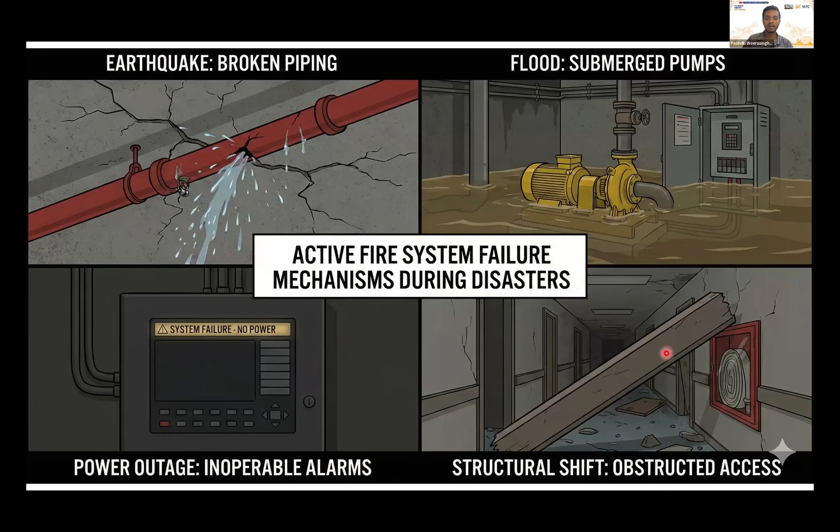Due to the power outage, these alarms and systems may not work, and due to structural failure, the evacuation paths may get obstructed. So in terms of active fire failure, the last line of defense that we will have is the passive fire protection system.

I will finish my talk moving on to that area of passive fire protection, and touch a little bit on performance-based design. That will be the final part.

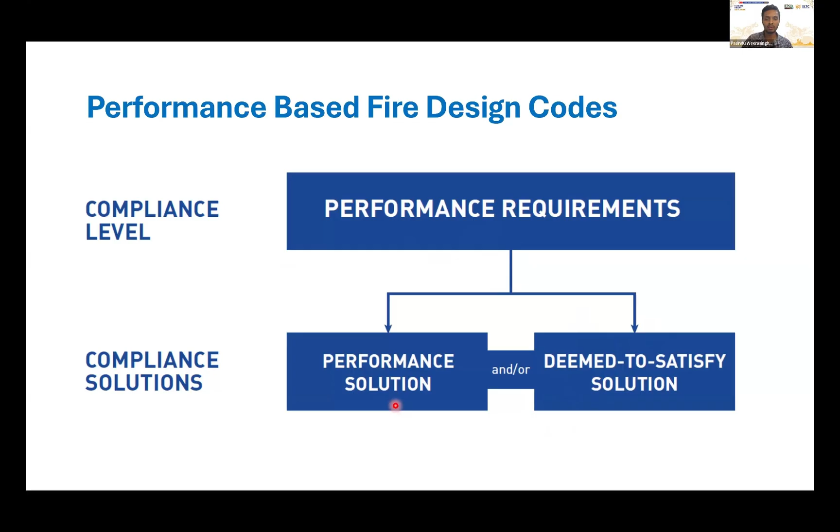In fire design, normally we have certain performance requirements based on the type of structure. To meet that, we can either use a deemed-to-satisfy code-based solution, which is a prescriptive one, or we can go for a performance solution. I will explain these terms later.

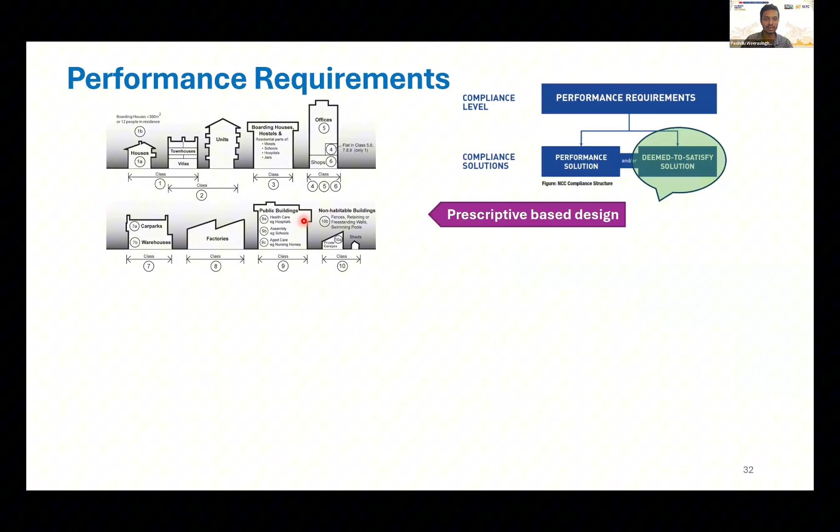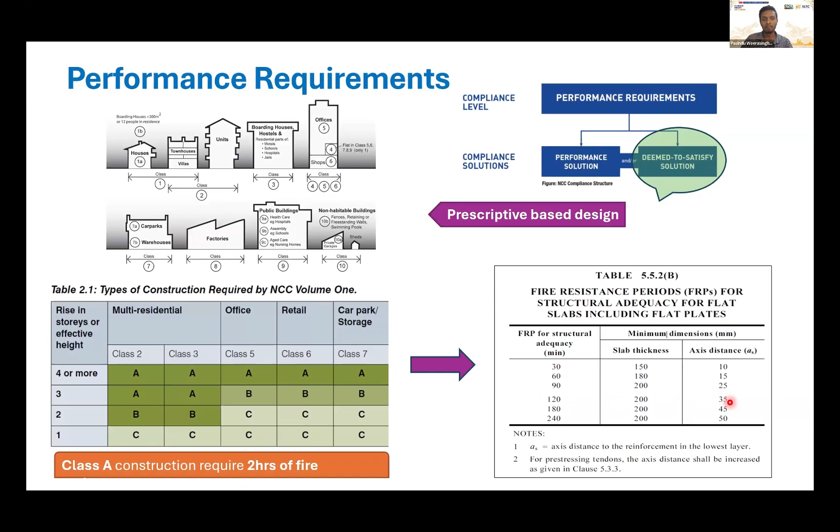A deemed-to-satisfy solution is, for example, categorizing the building according to different building classes, and based on the building class, determining the fire resistance level or fire class of construction required. Based on that, we get a certain fire rating, a number, and then design our members to meet that specific fire requirement using a prescriptive guideline. Let's say the minimum slab thickness to meet a 2-hour fire requirement would be 200mm for a flat slab with a cover of 35 millimeters. But that will not work in most cases.

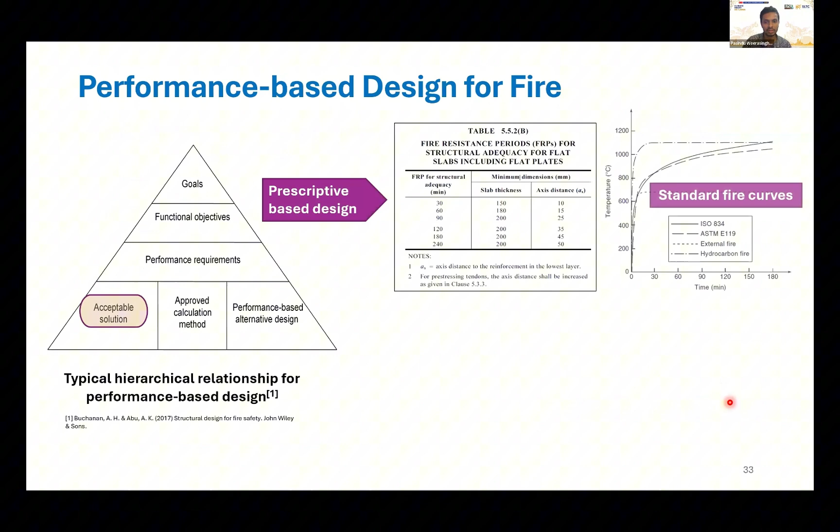The reason is that prescriptive-based design is an acceptable solution using standard fire curves and standard data. But in actual situations, the fire will have a decaying phase and a fully developed stage, or maybe the fire will not reach the flashover stage at all. The behavior of the fire will depend on the compartment size, the ventilation conditions, or the fuel load.

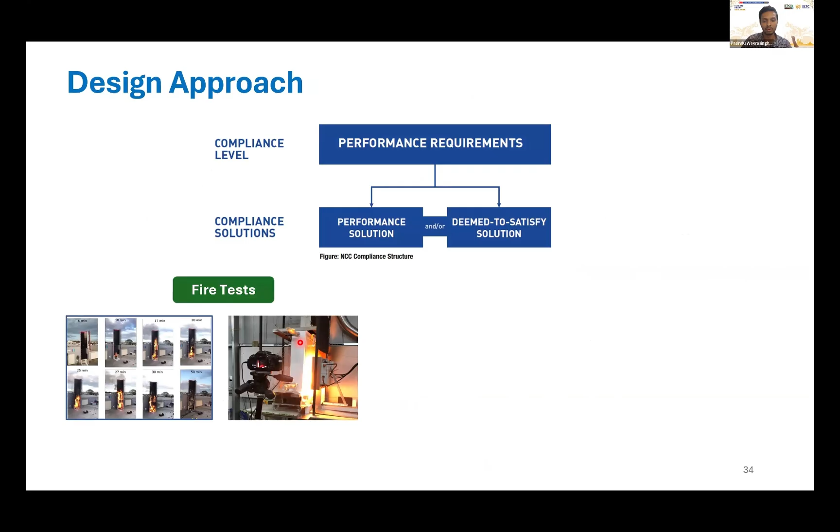If you incorporate everything and develop the natural fire curve, either by a parametric model or by fire simulations, and apply that natural fire curve to a structure to see the behavior, that is called performance-based design. This can be done either using fire tests to get the necessary data for simulation or modeling, or by fire modeling, or coupling fire tests with fire simulation data.

This approach is more suitable for an event or a secondary fire that could happen in a disaster situation, because in a disaster we will not have a normal structure, we have a damaged structure. When the structure is damaged, what could be the secondary effect of fire? Standard or prescriptive guidelines will not account for such events. In that case, the only approach is to go for a performance-based design.

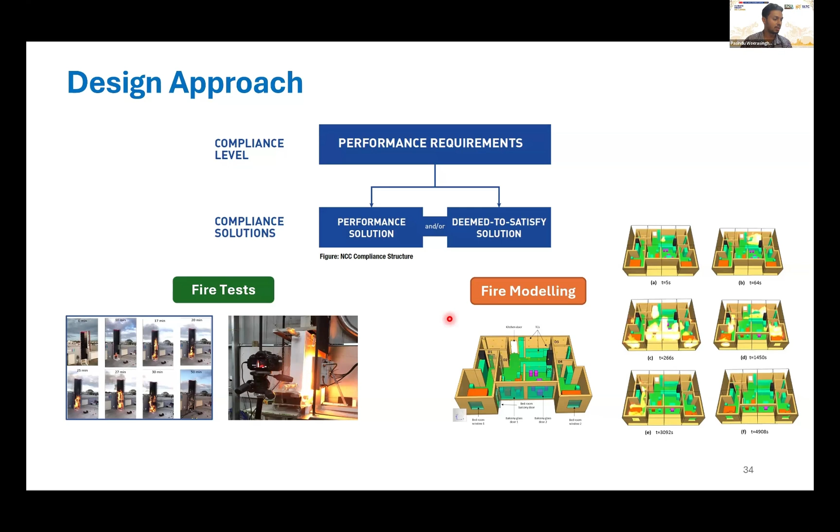With that message, I would like to finish my presentation, and I would be more than happy to answer any questions during the Q&A time. I hope you have got some idea of what this is about.

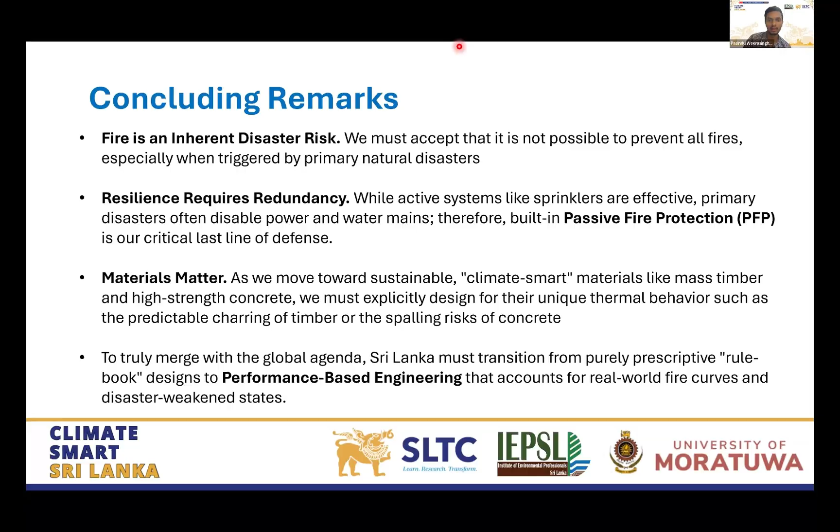Thank you, Dr. Weerasinghe, for the insightful presentation. I think there's a lot of information from various aspects of engineering, but that all led to fire and the respective safety aspects that we have to look at in terms of the analysis and design aspects.